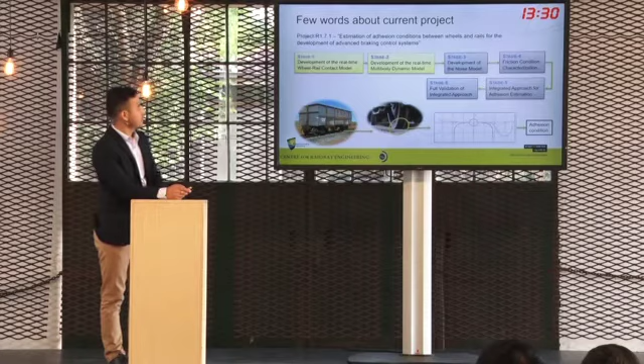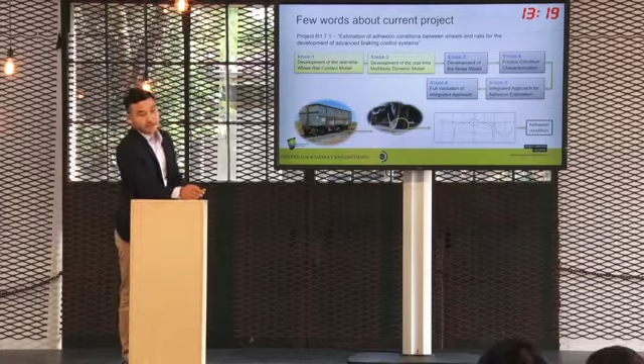So this is the status of my project. The main aim of this project is to estimate adhesion condition between wheels and rails. It has 6 anticipated stages among them. The first 2 stages are already completed, and today's work will be based on these two stages.

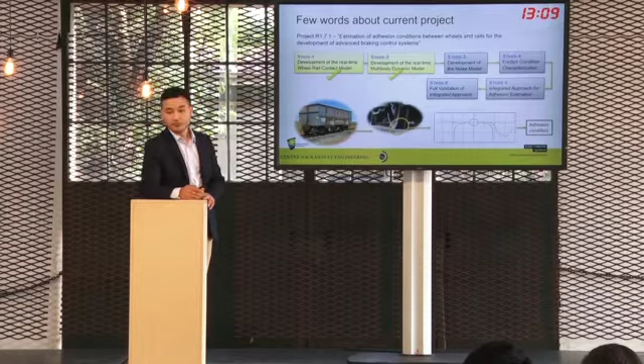We are from a heavy haul background, so for your interest, I think I don't have to tell you much about why adhesion study is required among us. You know why, because if we have proper information about adhesion condition, then our railway system will be more efficient, more productive, and cost beneficial as well. That's why we are into this innovation.

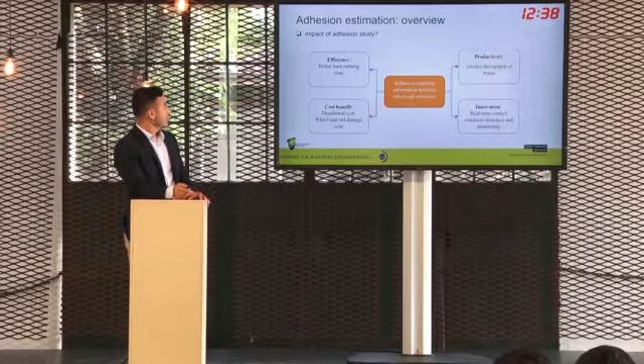So let's talk about adhesion estimation. At the beginning of this project, we had an extensive analytical review on adhesion estimation. It has already been published. I think it's not that clear on screen, so if you cannot see it, you can go online.

It suggested that for adhesion estimation, we need 3 special things: system input, purpose of adhesion estimation, and response time. These 3 are the main factors which can change the game. It also suggested that all those approaches have been verified under normal running condition, meaning the result will be different under traction and braking.

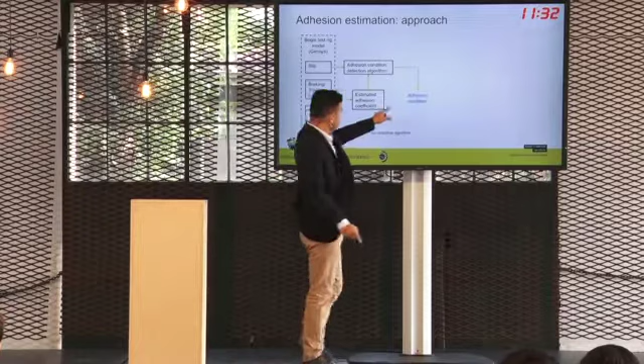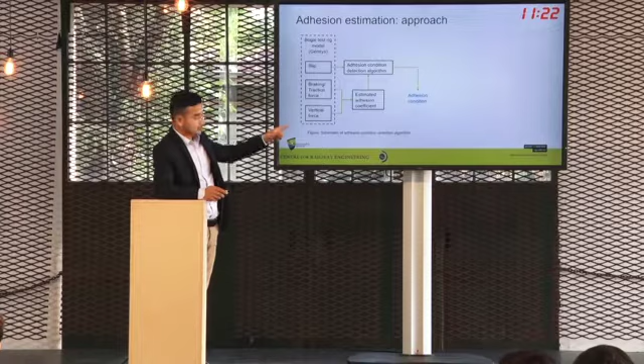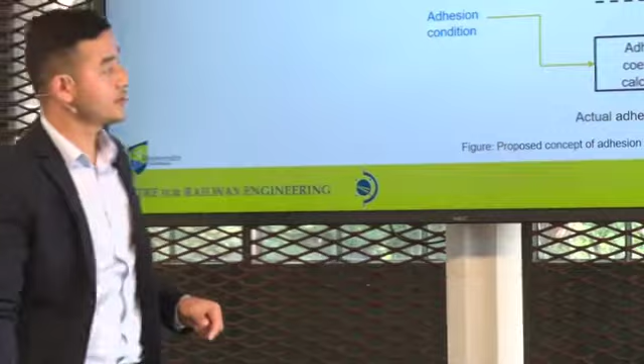So in our project, we have applied the adhesion estimation approach in a modular approach. First of all, adhesion condition will be determined from an adhesion condition detection algorithm, which will be discussed in the next slide. Once we have the adhesion condition, that information will be used to determine the actual adhesion coefficient. For that, we have proposed a special contact model which produces slip and creep force information, which will also be discussed in detail later.

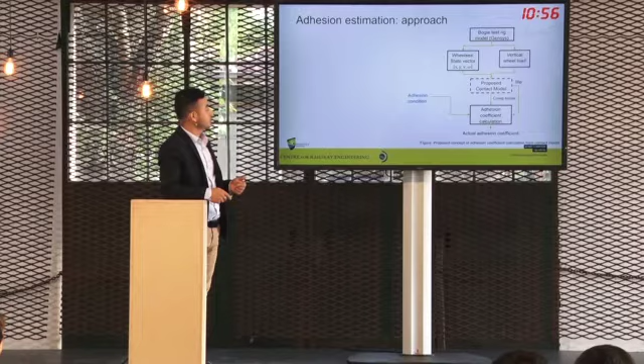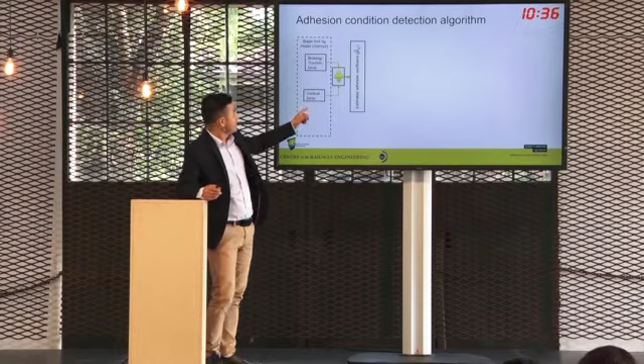Let's jump into the adhesion condition detection algorithm in a very simplified way. I'll try to make it very simple so that everyone can understand it. First, let's go back. Adhesion coefficient is estimated from braking or traction force and vertical force. So we'll have a curve dependent on velocity and slip.

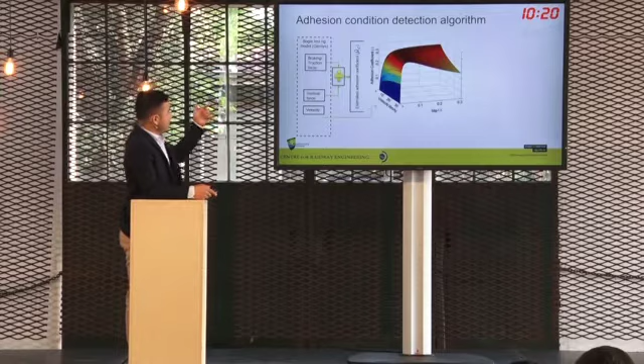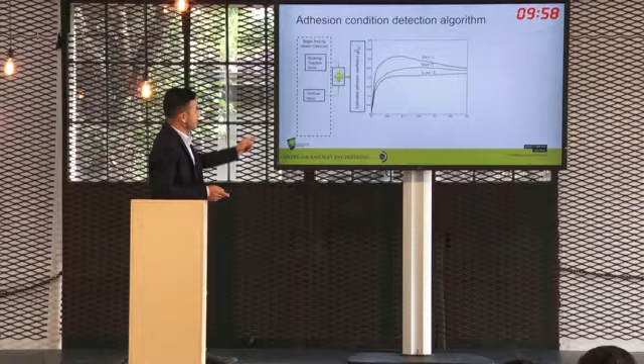This curve is for dry condition. Let's say the current velocity is 20 kilometers per hour, and this is for dry. There are 2 more curves, low and wet condition. So when it's fixed at 20 kilometers per hour, it becomes a very simplified curve, which is only dependent on slip.

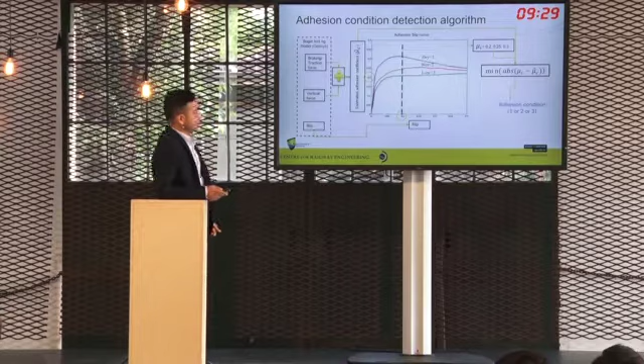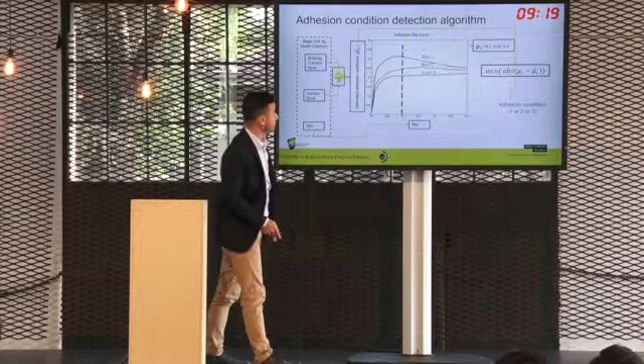Let's consider the slip at 0.1. Then there are 3 probable adhesion coefficients: 0.2, 0.25, or 0.3. From this information, using minimum absolute difference, we can find the condition. In this case, the minimum difference is 0.2 minus 0.2, which corresponds to low. So it will return low, 3. This algorithm will return 3.

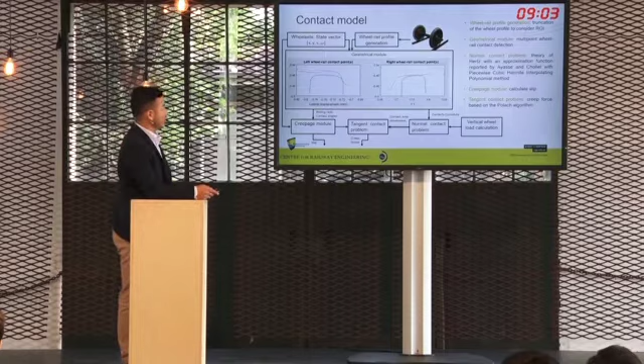After having this information, let's jump into the proposed contact model. It is modular based and has 5 modules. The first module is the profile generator, which is only concentrated on the region of interest, meaning some specific profile between wheels and rail.

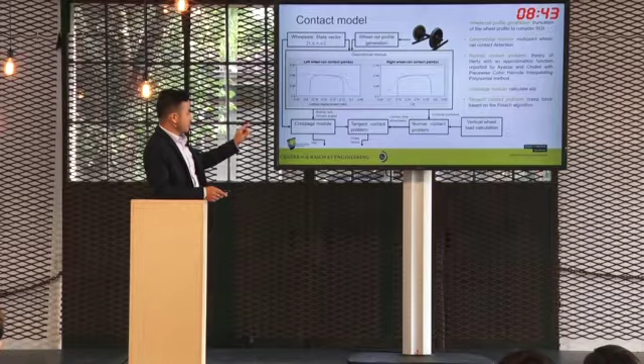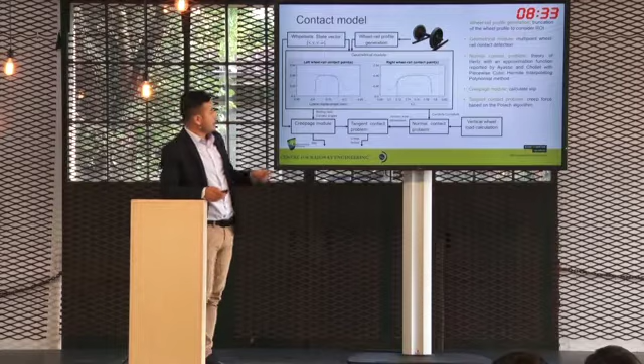There is a module called the Creepage module, which offers slip. There is a tangential contact module based on Polach's algorithm, which produces creep force. And for the normal contact problem, we have used the theory of Hertz and an approximation function reported by Ayasse and Chollet.

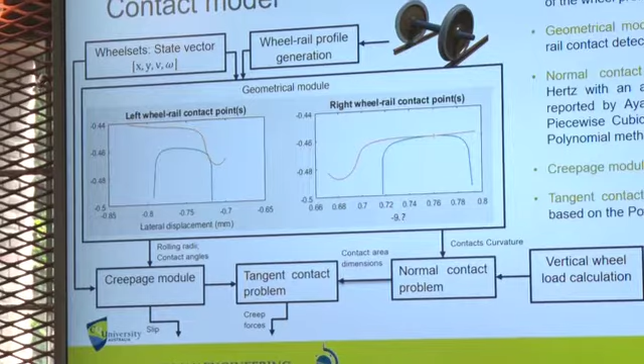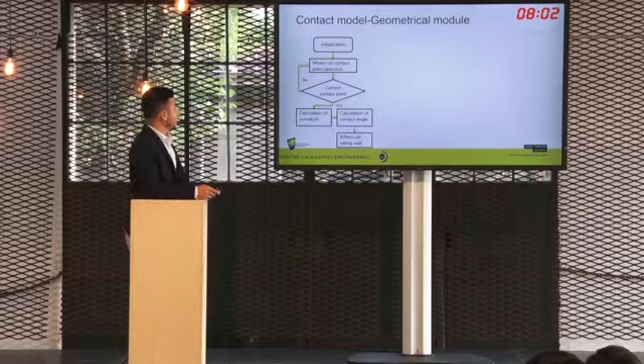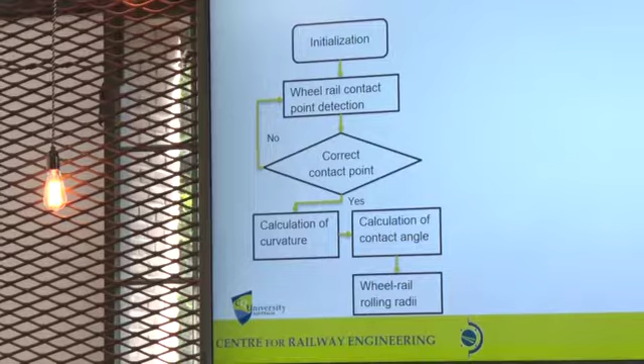And there is a geometrical model which considers multi-point, which will be described in the next slide. The main purpose of the geometrical model is to determine the contact point and its corresponding curvature, contact angle, and other related information. So it has 2 main sections: one is finding the contact point, and second, determining whether the potential contact points are exact or not. Let's jump into this section.

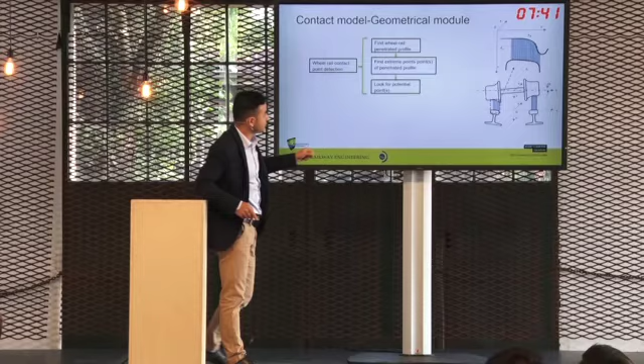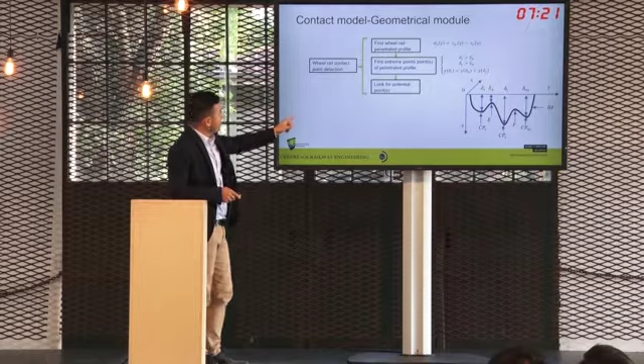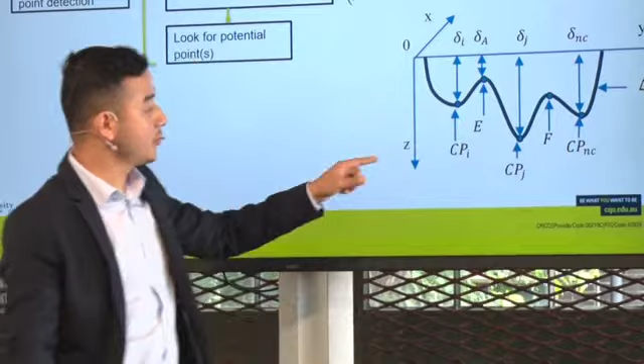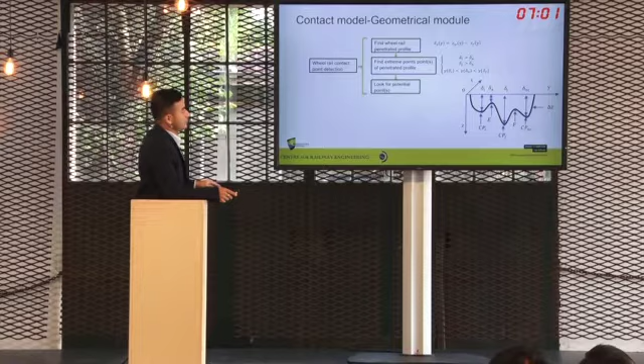First, the penetrated profile is determined from the region of interest, where you can see the penetrated profile delta z. Then extreme points such as CP and EF are determined. For multi-point, if it is just a single point, then CP1 will be determined. But if there are multi-points, then this might be the scenario. In that case, extreme points such as E and F will be there. That is one of the requirements, and there is also a requirement of width between 2 points.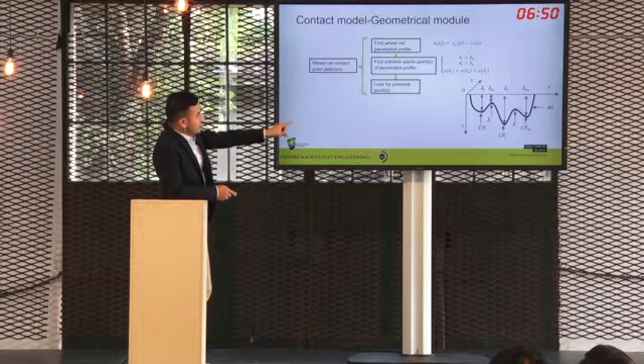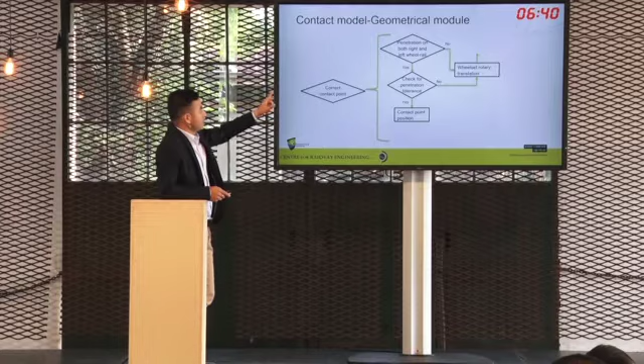So once we have potential contact points such as CPs, it finds whether those potential contact points are correct or not from the penetration requirement. That's how the contact points are determined.

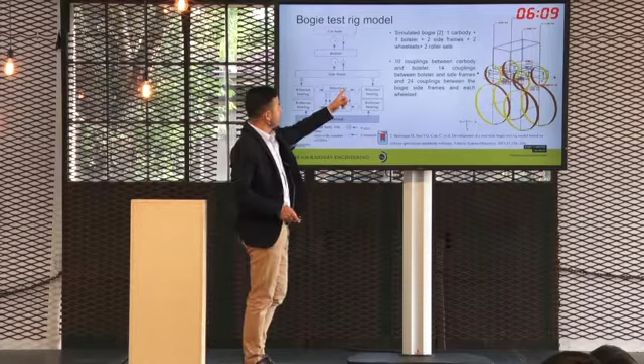So we have contact condition, we have contact model. To input the state vectors to the contact model, and also to validate, we have designed a BOGIE test rig based on reference 2, which has 1 car body, 1 bolster, 2 side frames, 2 wheel sets, and 2 roller sets in Gensys, as you can see on the right. And its corresponding force mass constraint with a number of degrees of freedom on the left.

So we have almost everything, we have done so many things. Now it's time to validate the setup. So we did 3 simulations. The first one is to validate the proposed contact model, and second and third is to detect adhesion in constant speed and braking mode.

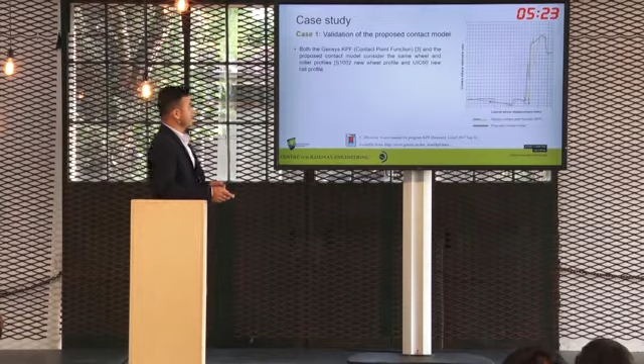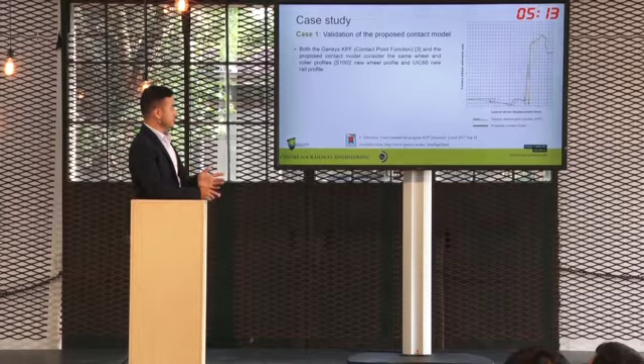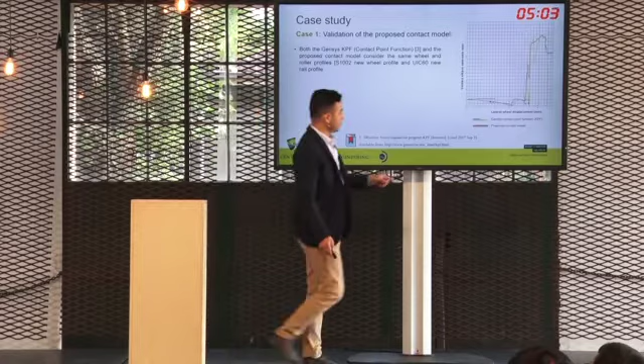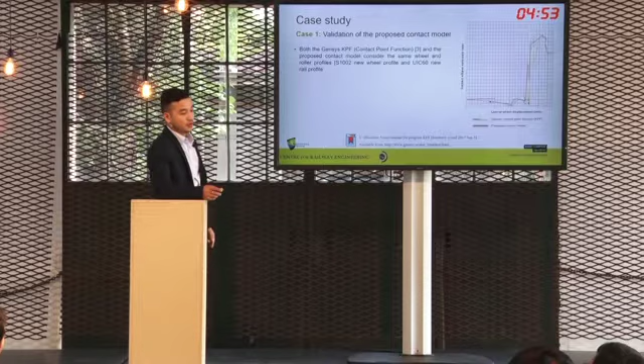To validate our contact model, we did it against Gensys KPF, which stands for contact point function, and we also considered the same wheel roller profile. We have done several parametric validations, and among them one is presented here, which is contact ellipse semi-axis ratio. We can see the result is a little bit different here at the contact switch and in the flange area, because at that stage in the proposed contact model, yaw angle was not considered.

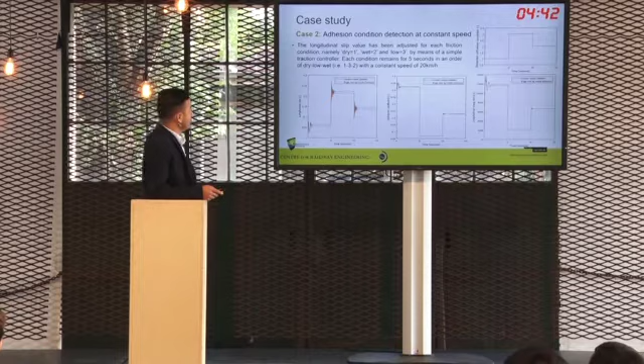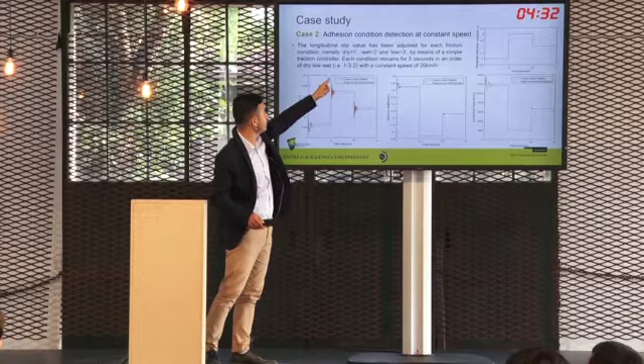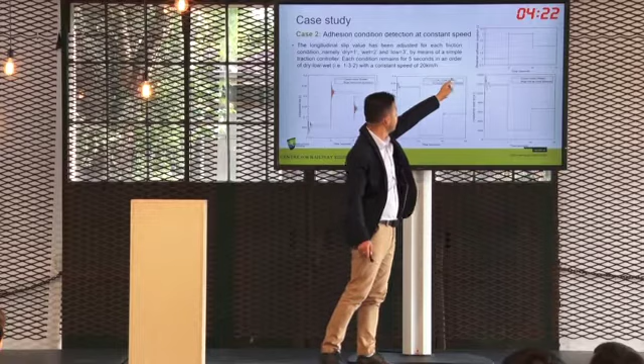To detect adhesion condition in constant speed, 20 km per hour was selected, and the longitudinal slip was adjusted in order of dry, low, wet, that is 1, 3, and 2. You can see the corresponding adhesion coefficient, longitudinal creepage force, and then detected condition 1, 3, and 2.

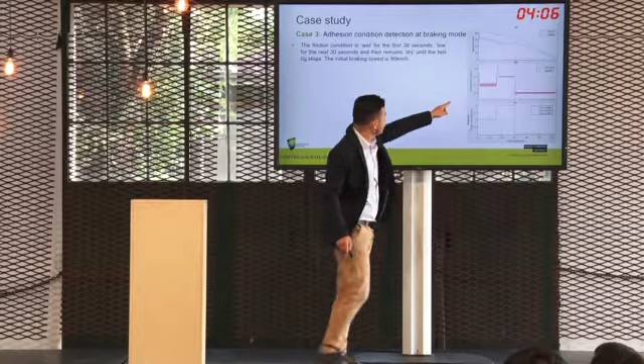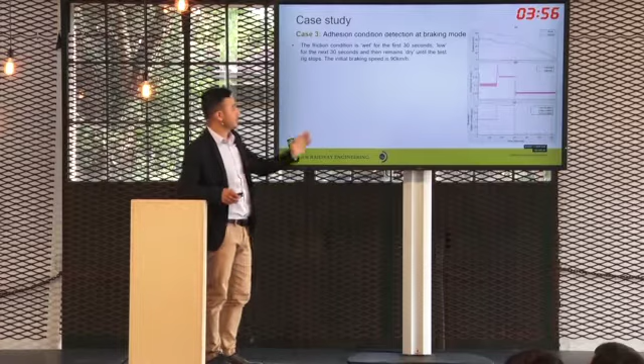Similarly, in braking mode, the setup was for the first 30 seconds wet condition was adjusted, and then low condition, and then dry condition was adjusted for the remaining until it stops. You can see the result: it was perfectly detected, wet, low, and dry.

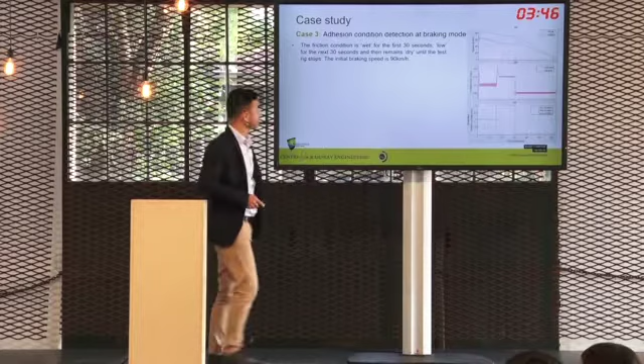So from all these experiments, validation, and study, it can be concluded that the algorithm is operational because it can handle slip under variations of adhesion condition, and the result is anticipated in both rolling and braking conditions.

So we have already started experimental validation work in our test rig, which is available in our research center. All those outputs and information will be provided in the next presentation, hopefully soon in the future. So please stay tuned with our project.